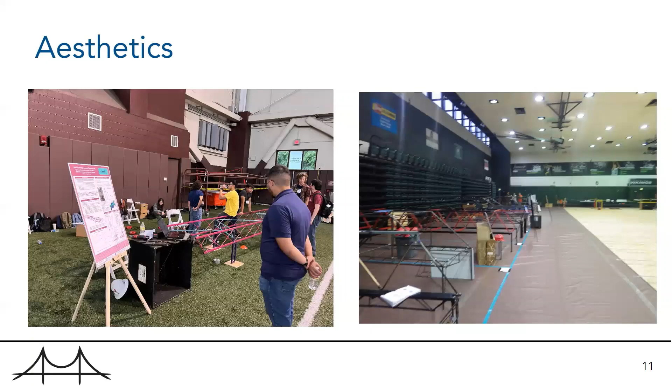What I like to call phase 1 of construction is pre-construction. Watch for your mailer from your host university for the schedule, but at the designated time, the students will disassemble their bridge out of their display area and move it into the staging area, which is outside of your construction lanes.

Judges are checking the materials. The bridge is actually only built out of 3 different materials: magnetic steel, loose bolts, and nuts. We use magnets and a permanent, pre-made wooden box to check the member lengths and widths. If any member is too long or too wide, the judges will let you know.

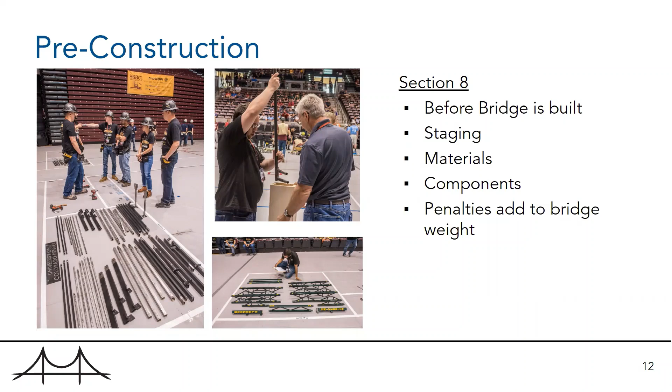All right, phase 2. It's time to build your bridge. The bridge is built inside the construction zone, which is inside the staging yards, and judges are watching builders move their members from the staging yard into the construction zone. They're tracking accidents like dropping nuts, bolts, or members, or stepping out of bounds or into the river. Accidents add time to your overall build time. Judges walk around your bridge tracking accidents and calling them out as they occur.

Notice in these pictures the flooring. On one end we've got turf and wooden plywood as the construction flooring, and on the other we've got carpet. I've also been to a competition where we had to build the bridges outside in an asphalt parking lot, and then I've heard about a concrete rooftop. So these are the existing conditions that apply to the entire region during that competition.

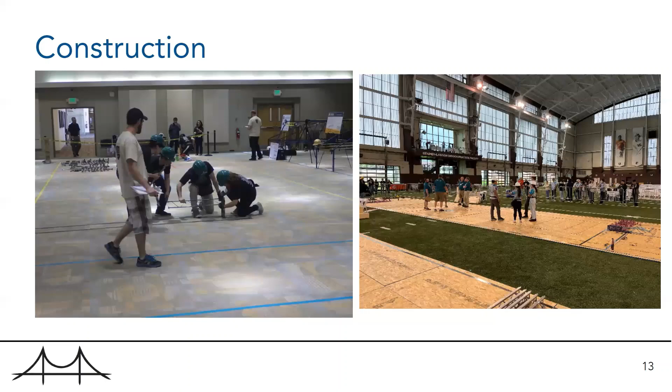Before construction starts, judges will check with the captain to make sure the team is ready to build. Okay, next slide, thanks.

Phase 3 of construction is in section 9. This is after the bridge is built. Judges are making measurements using our wooden templates and tape measures. We're checking functionality to make sure the decking will fit onto the bridge and the stringers, usability—if there are issues there, there are conversations we have to have—and connection safety, making sure the bolts and fasteners are connected.

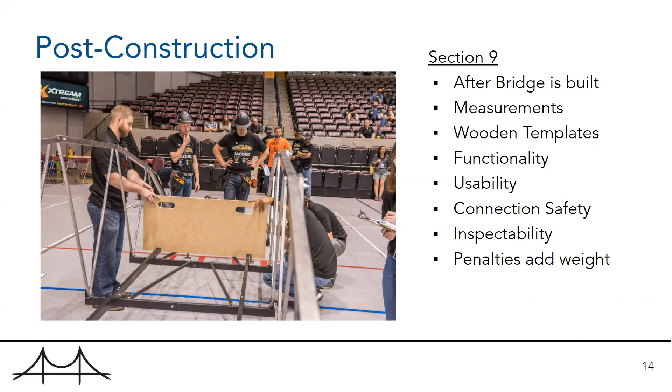If repairs need to be done, this will be the time repairs are done. If there are any dimensional violations, these penalties add weight to your bridge. We'll get into that in a little bit. Next slide.

Teams will move their bridge into the lateral loading, and judges will help set up the decking in the proper location, and a 75-pound counterweight will set up the sway device and the target. This year's sway is 1 inch. We'll put a 50-pound weight, and then we'll also apply a lateral restraint to prevent the bridge from sliding. If your bridge sways too much during this load, it won't qualify for awards.

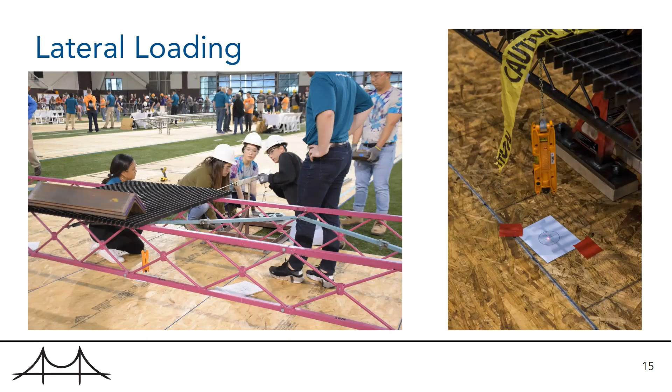Next. Vertical loading—this is the 2,500 pounds applied to your bridge. Exactly where it's applied is based on the die roll, which we'll get to in a little bit. These are applied using angle irons, and section 11.5 will go into detail of exactly how it's applied.

We've got some supports so the bridge doesn't catastrophically collapse, which does happen at some regionals and at nationals. It's done safely. You can see in the picture the red gauges—we're measuring deflections in 2 locations this year.

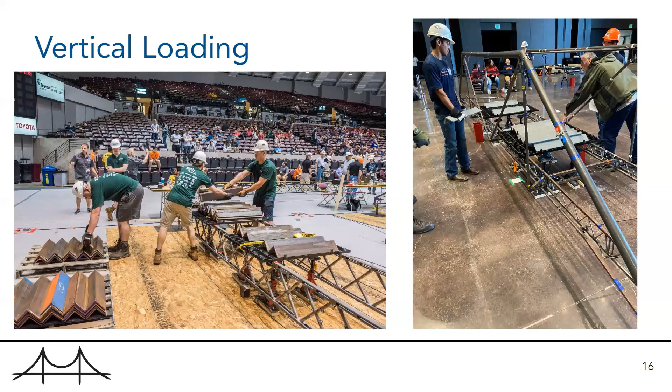Next slide. Oh, I forgot to mention we're also making sure you're unloading your bridge safely. We're not tracking sway or deflection at that point, just ensuring the bridge doesn't collapse during unloading.

The bridge weight, after all the load is taken off, then the bridge is moved into the weight station. There are 4 digital scales—you'll work with the judge to write down the bridge weight at each corner. I mentioned section 8 and section 9 have penalties—dimensional violations of members or tolerance violations will add weight to your bridge. So this will be the actual weight plus the penalty weight.

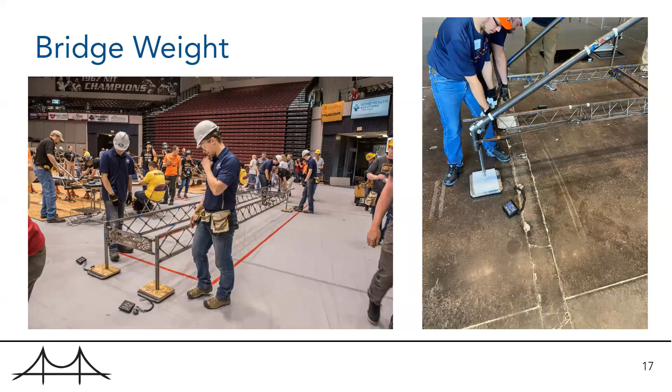After this, you're almost done with the competition. It's time to move the bridge out into the yard or back into your staging area where you can disassemble your bridge.

Section 6.2 outlines all the award categories: aesthetics, speed—how fast you built the bridge—the lightest bridge, the bridge that is stiffest or deflected the least amount. Construction economy is speed times how many builders it took. Structural efficiency is deflection and weight. Overall performance is just the sum of construction economy and structural efficiency.

Cost estimation is a somewhat newer award—it's the absolute value difference between your bridge's overall performance cost versus what you thought it was going to cost before the competition started. I'll get into that in the next slide. We take the top 3 in each category, and they receive awards during the regional banquet. There's also a national video award, and some additional special awards that happen at nationals. Next slide.

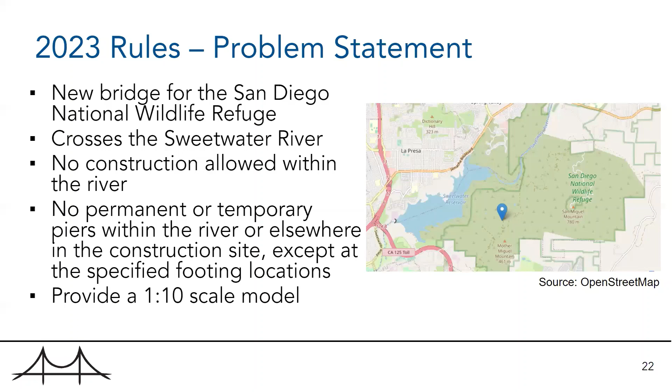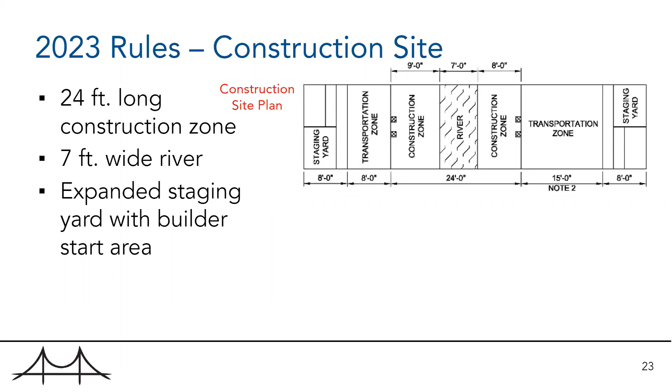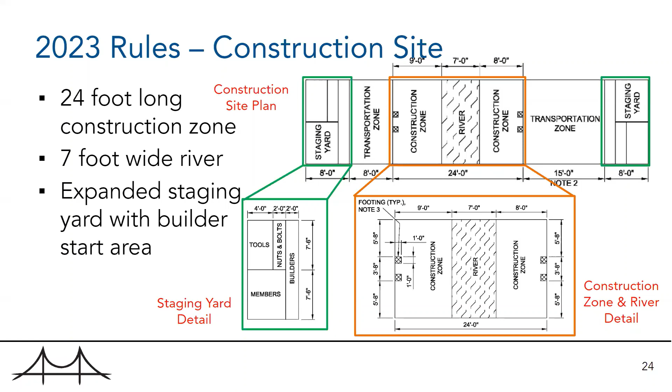With the staging yard, the location for members, tools, nuts, and bolts really hasn't changed from last year. It's still 6 feet in length there, but we've added an extra 2 feet to the staging yard because we've declared an area where we want builders to start. So rather than builders starting anywhere within the staging yard, builders are going to start in that first 2 feet of the staging yard.

As far as bridge dimensions, you can find all the changes associated with that in subsection 9.3. There are substantial changes in regards to the bridge dimensions this year compared to last year.

Some of the major things to note is that the bridge this year needs to be between 23 feet and 24 feet long. So this is one of the longest competition bridges there's been over the history of the Student Steel Bridge competition. Also note that the max height of the bridge is 5 feet, and the clearance under the bridge is 4 inches everywhere except over the footings, where obviously the bridge can touch the ground.

So the top of the stringers is where the loading grates will be placed, where the load will then be applied. Also note, for the top of the stringers, we removed the restriction on holes in the top of the stringers. This often causes significant confusion. We decided to remove that restriction, although I do suggest you make sure the top of your stringer is able to handle the grating that would be placed on it.

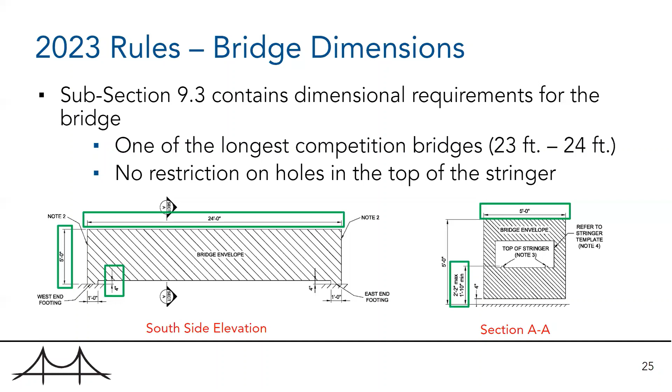Also note that there's a reference to the stringer template. That stringer template defines the passageway which needs to be available within the bridge. So there can't be any obstructions within that passageway.

So nothing like bolts, members, or nuts can obstruct the movement of that piece of plywood, that stringer template, through the length of the bridge, or there will be a penalty associated with that.

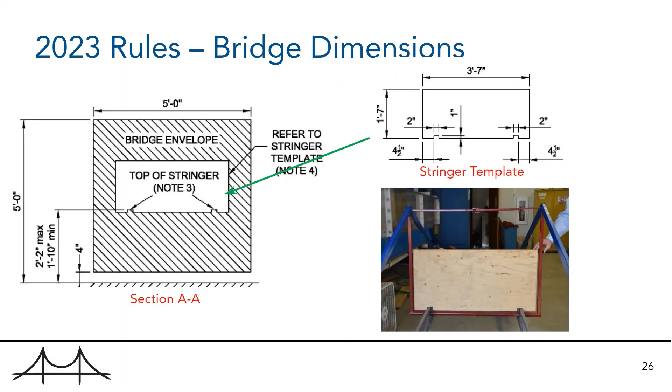Now, as far as connections, there actually wasn't that significant of a change in the connection requirements. We've made some changes in order to hopefully make it a little easier to understand the intent of the rules. So we have updated some of the definitions.

The definition of connection is a location where all faying surfaces resulting from 2 or more members coming in contact are penetrated by at least one loose bolt and secured by a loose nut, preventing the members from separating at that location without first removing the loose bolt or bolts that connect them.

We also simplified the definition of faying surface. It used to contain some further restrictions. Now that definition says the surface of a member that is in contact with the surface of another member at a connection. It's really just defining the surface, not putting any rules-type qualifications on that surface.

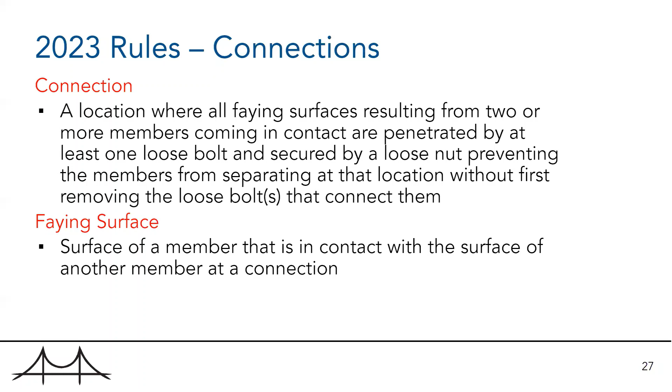If you look at subsection 9.4.1, it essentially tells you that all locations where one member touches another member require a connection. So if you have 2 members and they touch both at the tops and at the bottom, but don't necessarily touch in the middle, then there needs to be a connection at both the top and at the bottom, with separate connections associated with that. That's essentially what that subsection is saying.

Then you move to subsection 9.4.2 that better defines the requirements of that connection. It says each connection shall contain at least 1 and at most 2 faying surfaces associated with each member being connected. This is pretty similar to last year's rules. And then it says that the faying surfaces are the only location where members are in contact with each other. So if there's contact and a faying surface, there needs to be a connection there meeting the requirements of 9.4.2.

Now, one change we made is that the faying surfaces shall not have an inflection point. Last year, we allowed complex curves in regards to the faying surfaces. Now you can only have a gradual curve, no inflection point in that faying surface. And like last year, we said that contact surfaces on either side of a corner or bend shall be treated as separate faying surfaces, but they'd be separate faying surfaces of the same connection. We've also put definitions of corner and bend into the glossary this year.

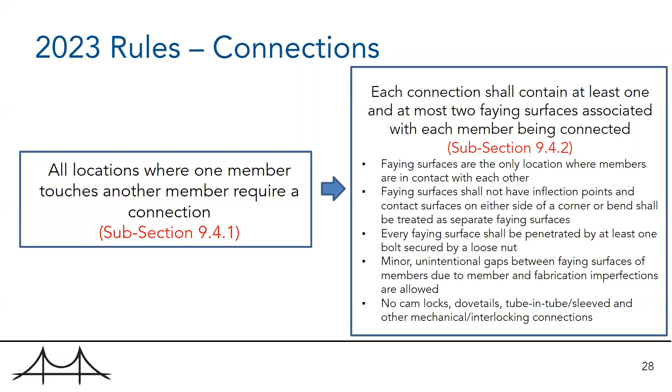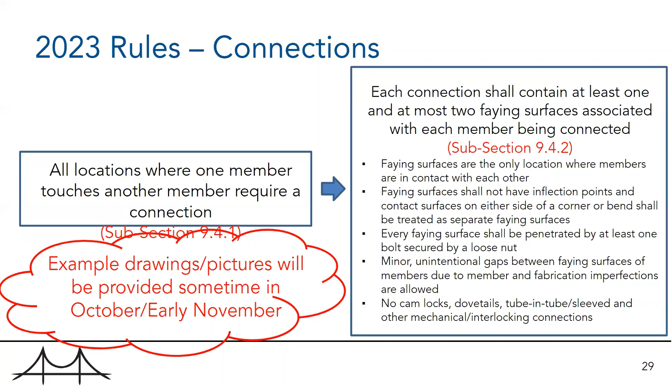Unlike last year, this year we will provide some example drawings and pictures to help clarify the intent of the rules. We're hoping to have these out towards the end of October, early November for you. An announcement will go out in terms of when these are available.

Now, where we did make some major changes to the connection rules was in how they're penalized. This year, if there is a connection violation identified by the judges for subsection 9.4.1, 9.4.2, 9.4.3, and 9.4.4, teams will have an optional 5 minutes to correct that connection violation. If they choose to use that optional 5 minutes, they will be assessed a 5-minute time penalty. Now, if the connection violation still exists after 5 minutes, or if the teams choose not to correct that violation, then a 2-minute penalty will be assessed for each individual violation of 9.4.1 through 9.4.4 that still exists. So the bridge will be able to continue on with the competition, will be eligible for all awards, and will be eligible for loading, even though those violations still exist.

This also brings in an interesting question that teams are going to have to think about: if you only have 1 or 2 connection violations and you think they're not going to have a specific detrimental effect on your deflections, you may choose not to correct them and take 2 minutes or 4 minutes worth of penalties rather than the 5-minute penalty to actually correct it. So those are decisions teams will have to make over the course of the competition. There's also a new 2-minute penalty if the faying surface is not inspectable.

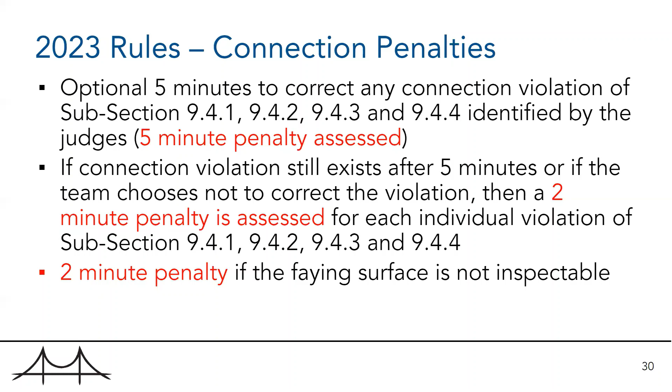One of the major changes this year is that we are not allowing welded nuts and bolts. They're not allowed as part of a connection, and they're also not allowed for use of any other kind within the bridge. If there is a welded nut or bolt, that would be a violation of subsection 8.2.2.

So looking at the lateral loading, Javier provided a little explanation. I'll focus largely on the 2023 rules with respect to lateral loading. There's only a single lateral load test this year, unlike last year where there were 2. The location for grating will be measured from the west end of the north side stringer, based on distance S, which will be defined by the die roll, and will be either 7 feet, 10 feet, or 13 feet. The 50-pound load will be applied to the south side of the bridge, and the sway will be measured on the south side.

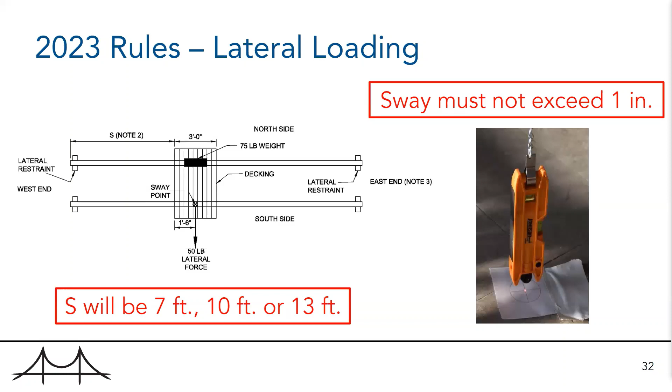As Javier mentioned, the sway must not exceed 1 inch. Last year, the sway must not exceed 0.75 inches, so we've increased the allowable sway. As long as that laser dot remains within a 2-inch diameter circle, you're going to pass the lateral loading test.

For the vertical load, really nothing's changed from past years. You have 2 gratings. The first grating is placed at L1, the second at L2. Both of those distances are measured from the west end of the north side stringer, and their distances are based on the die roll done at the beginning of each individual competition.

Deflection is going to be measured on the north side and south side of the bridge, and we're also going to observe sway on the south side during loading. 1,400 pounds will be placed on the grate at L1, and 1,100 pounds will be placed at the grate at L2. We've also tried to communicate to judges that if angles are being used for loading, those should be placed in an interlocking manner, with consistency in how different teams place the load on their bridge.

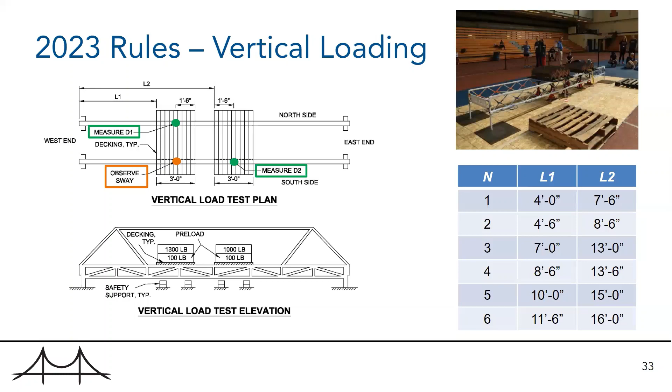We've updated the construction economy and structural efficiency equations. Now the cost per person-minute is $100,000, and the cost in terms of penalized time is $250,000 per minute. When looking at structural efficiency, the measured weight is raised to an exponent of 1.85 and then multiplied by 45 to get the cost associated with the weight.

The penalized weight is going to be multiplied by 2,500 dollars per pound, and the aggregate deflection is going to be multiplied by 2,750,000 dollars per inch. What we've done is tried to normalize things so that the penalties associated with construction economy and structural efficiency have similar effects on the scores.

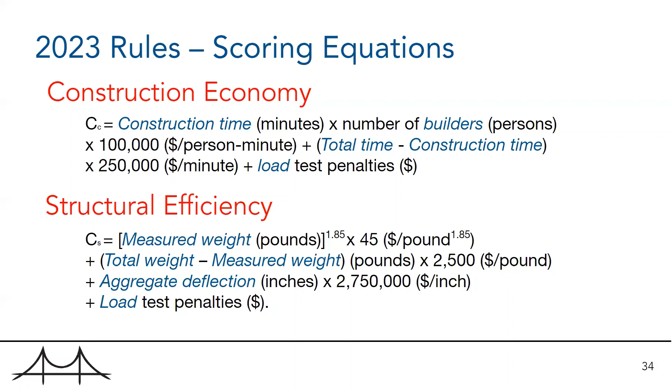So hopefully that gives you a good overview of the largest changes made between the 2022 rules and 2023 rules. What I wanted to do now is talk a little bit about the rules clarification process.

You're allowed to submit questions in terms of clarifications with respect to the rules, but the questions are limited really to interpretation of the rules. We cannot, as a rules committee, validate specific designs or procedures. We can't do that for every team, so we're not going to do it for any team. That's essentially what it comes down to.

There are times you may submit something and we can turn that into a more general question about the rules, and we'll go ahead and answer that. That may be why a question comes out slightly different than what you initially asked. The other thing to keep in mind is that your question needs to be clear enough for us to interpret it. The clearer the question, the more closely we'll get to the actual answer you're looking for. You're going to submit questions through aisc.org/SSBC, as Christy had mentioned previously.

It'll typically require 2 weeks to provide a response, although the initial clarifications that came out since the rules were put in place will take a little longer, but they should be out hopefully next week if you've submitted a clarification already. Responses are only posted under the official Student Steel Bridge Competition clarifications, so you won't receive an individual email with the response.